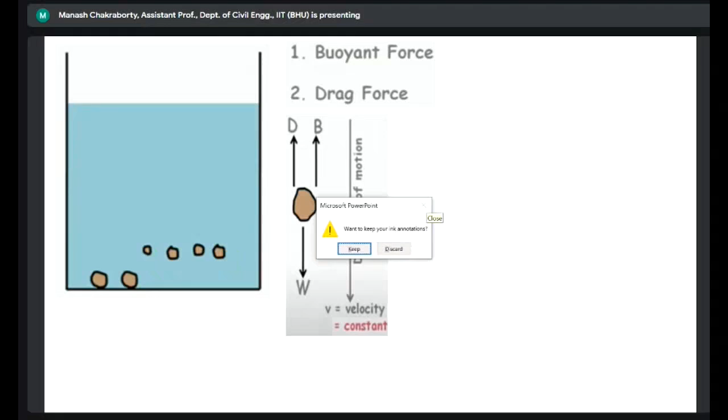Hello? Hello? Hello? Am I audible? Yes, sir. Yes, sir, you are audible. Yeah.

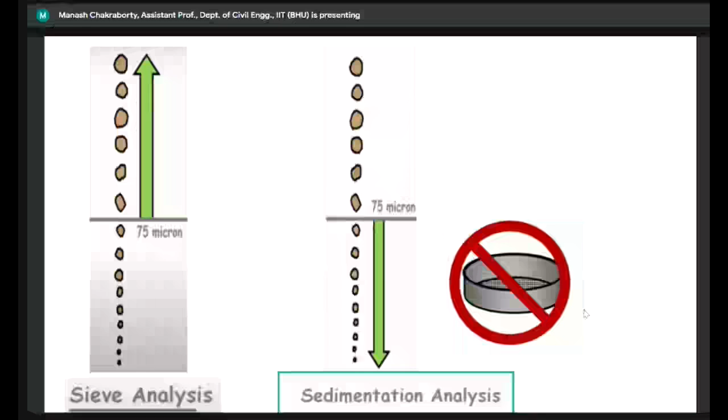Okay, so for these particles which are less than 75 micron, we'll be performing this sedimentation analysis. Now, what is the logic behind this sedimentation analysis? We consider that a particle will start to settle, because we know that any material in nature will try to attain an equilibrium state.

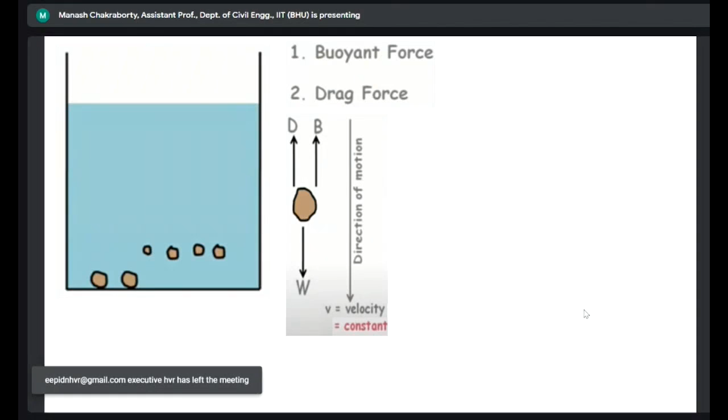So that's the objective of all material, and so for these particles too, the objective is to reach that equilibrium state. What we have studied in our engineering mechanics class is that when a particle flows on another substance, or when a particle is there in any kind of material among other foreign bodies, there are a few forces that act on that particular particle. Obviously weight is one of the forces. Apart from that weight, you have this drag force as well as this buoyant force.

Buoyant force will be because of the Archimedes principle, and this drag force due to Newtonian mechanics. Now the equilibrium state is when your weight force will be equated with this drag and buoyant force. So the summation of the drag force and the buoyant force needs to be equilibrated by the weight force. That is the objective of each particle, so the particle will settle on this medium, and the medium that we'll be considering over here is water.

So what we'll be doing is take a certain amount of soil which passes through this 75 micron sieve, and we'll place it on water. Now the particle will start to settle. How long will the particle be settling? Till the moment it reaches this state, so this particular equation is being attained.

And if we just use this drag force, buoyant force, and weight force, and write the expressions of these forces, then eventually we'll be getting an equation where we can see this last equation where V is denoted as velocity, which is a function of a constant number and the diameter of the particle, where capital D refers to the diameter of the particle. So don't get confused with this D and that D -- although I should have mentioned different things. So this is the drag force and this D is the diameter part.

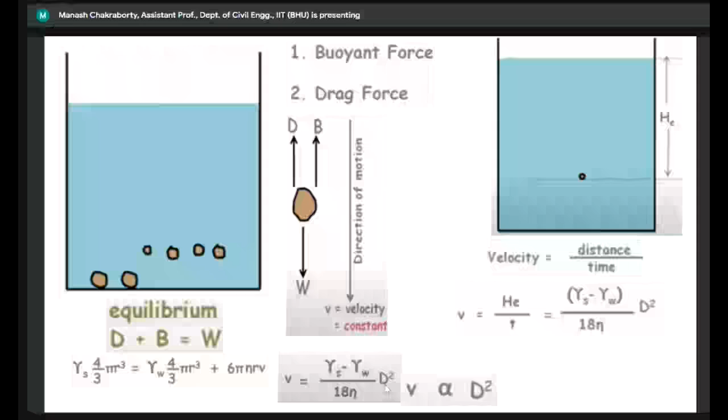So what we'll be doing is, we need to have this velocity. If I just take one individual particle, at a particular depth, you have this HE, which is known as the effective depth. This is something which is measurable. How will you be measuring it?

You can measure it by using two different approaches. One is known as the pipette method, the other is the hydrometer method. The hydrometer method will actually provide us this HE, and how this HE is going to vary with time.

If I know HE, and I can get this HE for a particular or specific time, and this is a constant number, I can get this D value. So that is the way we use this hydrometer method. So the objective is very clear.

In this, we are taking the help of sedimentation analysis, and especially the Stokes law, wherein we are determining this effective depth, which is HE. HE will be obtained through the hydrometer, if we perform hydrometer analysis. If we perform the pipette method, which is normally not performed in many laboratories, therein also we'll be getting this HE part.

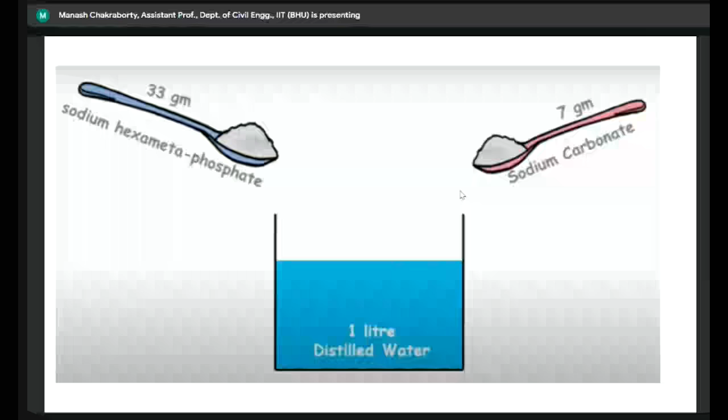This is a jar which contains the deflocculating chemicals along with 1 liter distilled water and the sample as such. That needs to be poured into another jar, where the measuring units are provided, because this is where we will actually perform the hydrometer analysis.

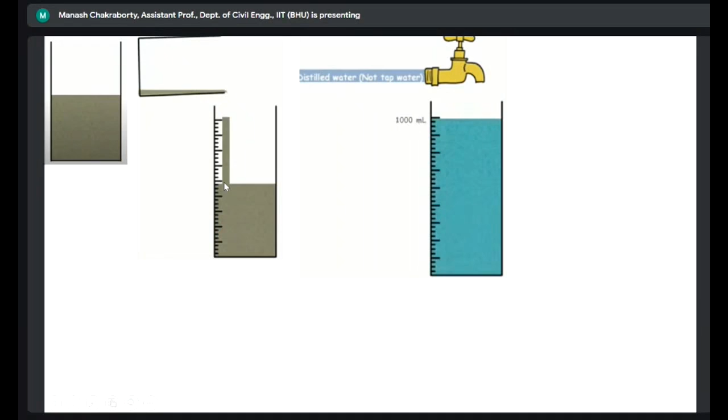It is suggested that the entire amount of this substance should be up to 1000 milliliters. So after pouring this sample into the measuring tube, if it is not 1000 ml, if it is like 700 ml or 800 ml, we need to pour distilled water. Upon pouring this distilled water, it will reach 1000 ml, and then we need to shake it vigorously to make the sample homogeneous.

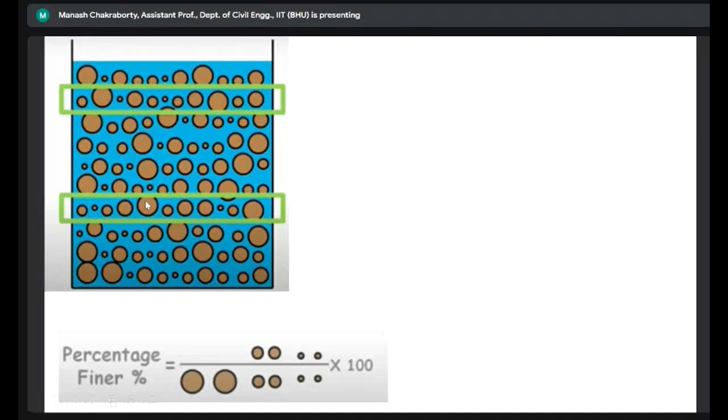Once the sample is homogeneous, it suggests that everywhere the number of particles or their arrangement is the same. Let's say if I look at two layers: if there are two big particles in one layer, this particular layer will also show two big particles. If there are middle-sized particles, say 6 in this layer, this middle-sized particle count will also be 6 over here.

After this, when you give time for this material to settle, what we've seen is that higher the diameter, higher will be the speed of settlement. So the terminal velocity of the particle will be quite higher, and this big particle will be settling faster than the small particles. So for the same layer, after half an hour, for this layer there are only two particles remaining, and over here you have 6 particles.

So what we need to see is the percentage finer. That is our job. How will we get this percentage finer? By seeing this, let's say if you have to get the percentage finer of this region...

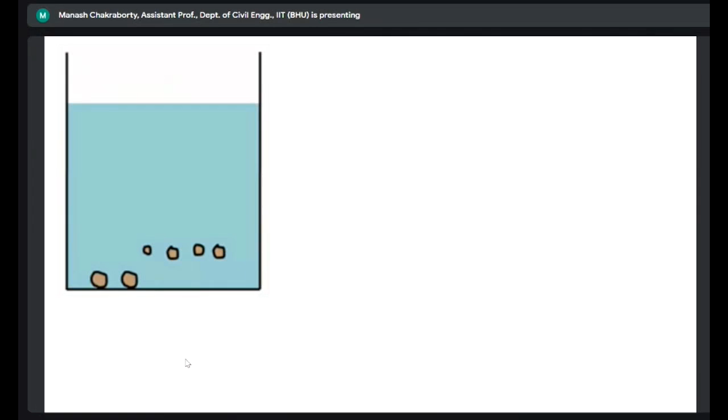Again, how will we be doing it in the laboratory? We'll be doing it through the hydrometer. In that hydrometer part, eventually we'll get one particular number known as the hydrometer reading. That reading will be used for determining two values: one is the diameter of the particle. How will we get this diameter? From this equation, we have to get this He from that hydrometer reading.

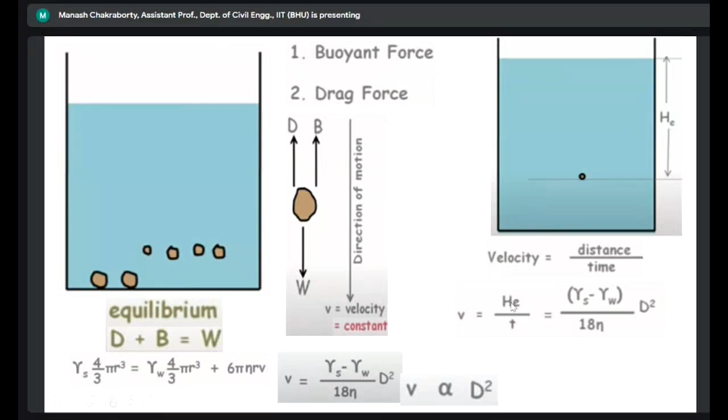Now there is a kind of relation, and I am not covering that particular part right now, of how the hydrometer reading and this effective depth are related. That is available in the code through something known as the calibrating chart. So for each hydrometer reading, this He is fixed, and you can get it from that hydrometer reading.

Next, what you need to do is get the percentage finer. How will you get it? Again, you have the hydrometer reading data, and that needs to be incorporated into one particular equation. That particular equation will give you the percentage finer.

These slides are meant to show you the glimpse of the importance of this hydrometer reading. The hydrometer reading will be used to get this He, and He eventually will give you two values: one is the diameter, and the other is the percentage finer. We'll get the diameter by this kind of inverse approach, and we'll get the percentage finer by the direct approach. Once these two values are obtained, then we need to get the grain size distribution curve.

Now, obviously, is this method completely justified? No, obviously not, because we have a lot of assumptions. Remember, this thing in soil mechanics is full of assumptions. It's completely empiricism, and lots of assumptions are involved. But as an engineer, we need to be aware of those assumptions.

Because this is the method that is being suggested to us. But once the data is being given, we need to adjust something so that these limitations, or these assumptions, are being gotten rid of in some way, right?

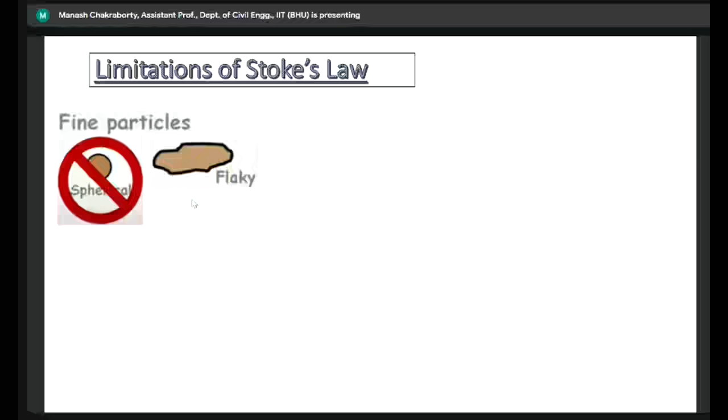One thing I told you is that Stokes' law is based on the assumption of particle diameter, and how we define particle diameter, we assume the particles to be spherical. But in case of fine grained particles, less than 75 micron, none of the particles will ever remain spherical. The particle will be flaky in nature, plate shaped. So can you assume this flaky particle to be spherical? Obviously not. So that is one of the major limitations of this approach, which we normally do in this hydrometer test.

Next, what we assume is that the specific gravity of each particle is the same. We don't say the specific gravity of the bigger particle and the smaller particle are different. When we compute percentage finer, we use one particular specific gravity, which is a kind of average specific gravity, and will not give importance to the independence of specific gravity related to each particle. So that is again a major limitation of Stokes' law.

Then in Stokes' law, we allow the particle to settle down, but Stokes' law is valid only if there is no restriction imparted on the particle, or in other words, the extent is infinite. So when particles settle in this measuring tube, they will have different kinds of motion, getting diverted because of the boundary. That is something which should not be there in Stokes' law. So this equation, the percentage finer equation I was referring to, is valid only if the particles have a free flowing environment.

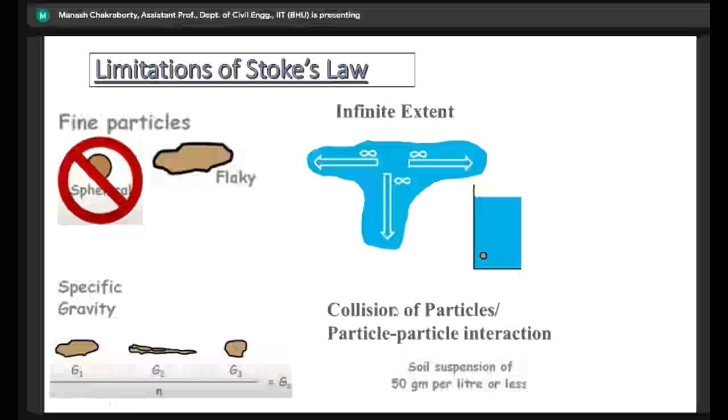While performing this test, keep in mind that although I said below 75 micron we will be performing this hydrometer test or pipette test, we have to be careful that if the particle is below 0.2 micron, we can't do this test, because there will be Brownian motion. And even if the particle is greater than 0.2 millimeter, again we can't perform this test because there will be turbulence. I told you about terminal velocity earlier.

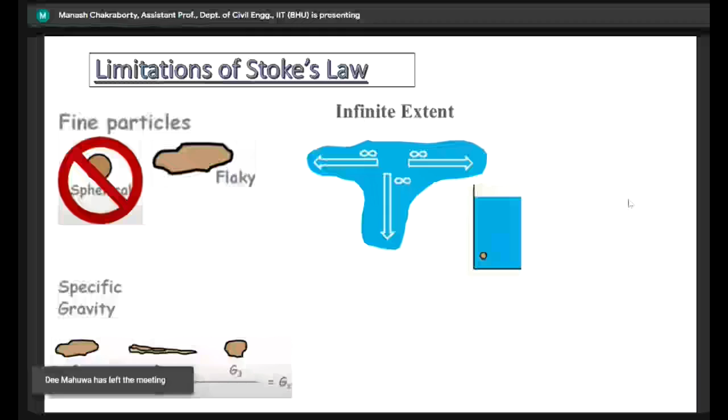While referring to this velocity, I used the term terminal velocity. And when talking about terminal velocity, I used the technical word laminar. That velocity will be attained when the flow is, in a sense, laminar. It may not be completely theoretical free flow, but the turbulence should not be there. So these are some restrictions and limitations associated with this law, and we have to be careful.

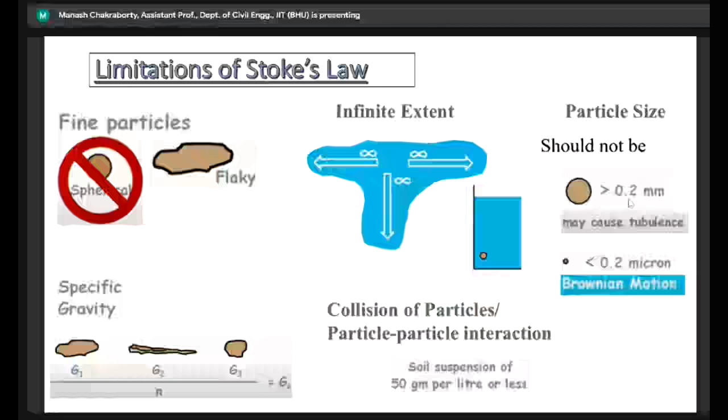That's what we mean. So now, eventually, from this grain size distribution, we have performed the sieve analysis, we have performed hydrometer analysis, and eventually we'll be getting a grain size distribution curve.

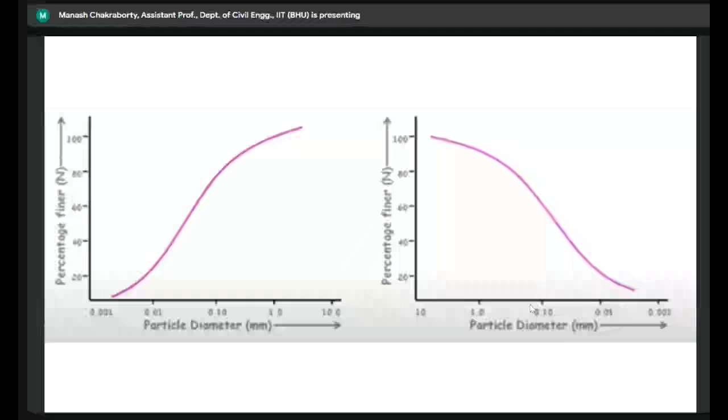That's the advantage of using this logarithmic scale for the x-axis. But for the y-axis, the value is from 0 to 100, and it can be plotted in arithmetic scale. So here you have the arithmetic scale, and here you have the logarithmic scale. This is a semi-logarithmic graph used for plotting this grain size distribution curve. My discussion will be based on the first way of plotting, where the bigger number is plotted on the left side.

In the IS code, it is suggested what the size of the particles is, or the name of each particle according to their size. Gravel, as I've already mentioned, refers to particles higher than 4.75 mm. And sand is from 4.75 mm down to 75 micron. There are obviously far more classifications for each of these sizes.

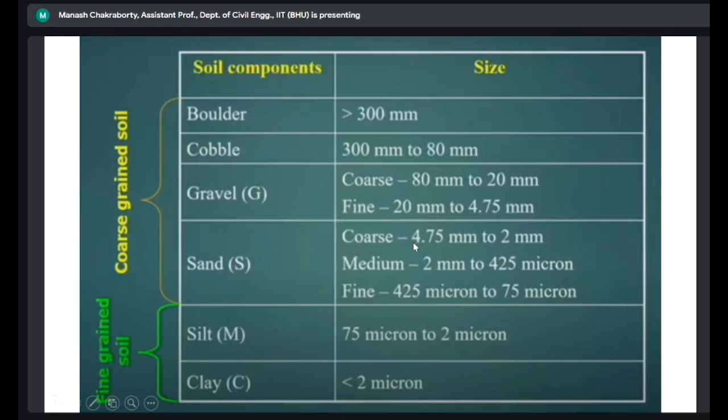Now look at this particular curve - what does it suggest to us? This particular curve suggests that the soil for which this graph was obtained consists of all particle types: gravel, sand, silt, and clay are all present. When we look into a grain size distribution curve, I'll talk about what things we need to actually look into. First we need to see whether all the particles are there or not. Then we need to see which particles are more dominating.

Let's say for this case, what we can see for silt kind of material - how much percentage is there? How much percentage finer is there? It can be read as going from maybe 65% to around 10%. So a huge amount of silt seems to be present here. First of all, all the particles are there - that itself is an observation that makes sense. Next, we need to understand which type of particles are predominating. I will show you some more curves.

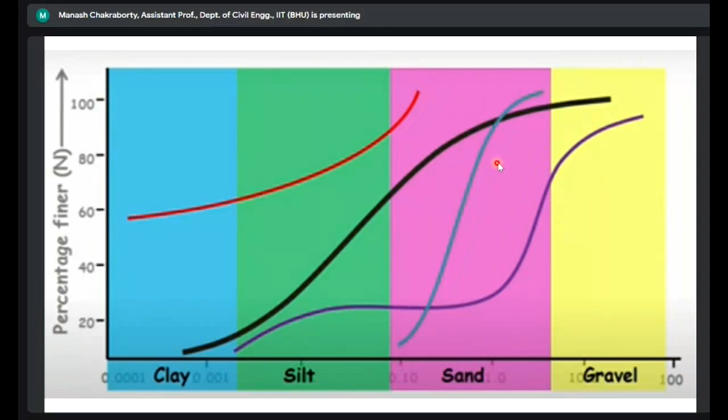Now let's talk about this blue curve. It doesn't have any gravel, silt, or clay, nothing is there for this blue curve. So the soil for which this blue curve is obtained, that particular soil actually consists of only sand particles.

Now you have one more curve over here. This particular curve is somewhat different. Although we can see some presence of gravel, sand, silt, and to some extent a bit of clay, one thing we can see is this horizontal part. What does that mean? This horizontal part means there is missing of some particles, so here there's actually no particles as such.

Now let's say I project this point on the x-axis and this point on the x-axis. What eventually I'll be saying is that the diameter here may be, let's say 0.009 or something like that. So for 0.009, if you have like 25%, for the other point you'll almost be having 25% too. So there is a missing of particles, or having particles of uniform shape. Both things can be treated as not having a good linkage with the engineering properties.

Now you can see one more curve over here. What does this curve actually replicate? The black one is a typical grain size distribution curve. How does this black line look? It looks like an S-shape. This S-shaped curve is more attractive, giving an implication that that particular soil is good in engineering behavior. But when you have this kind of curve, which is concave upward, it tells a huge amount of different story.

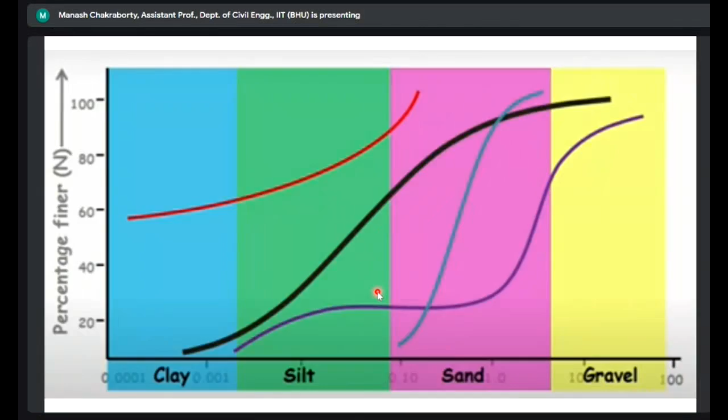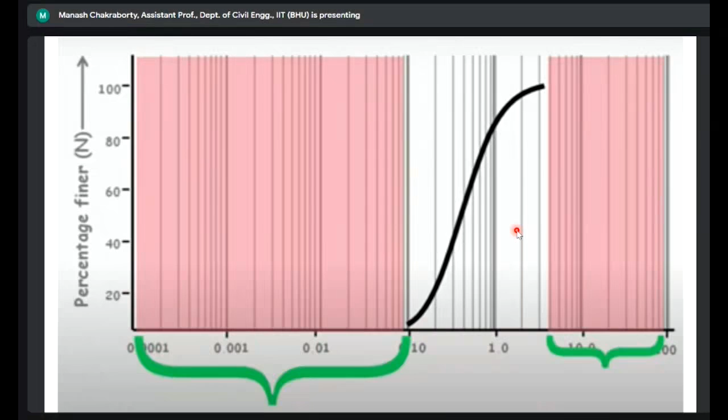So when I talk about this black line, what we can see is that these particles are kind of missing for this black curve too. So in a sense, although it looked like an S-shaped curve, it is in a sense S-shaped, but whether it's recommended, to some extent yes, if you don't have representation of all other particles. But this is also a curve that talks about uniformity - all the particles will be uniform in nature. So you may have this uniform kind of curve, where all particles are uniform, or you can have this kind of curve where there are some missing particles.

So you have this horizontal line, and the horizontal line represents that missing stuff. Or you will have this red kind of curve, which is highly not recommendable - we will talk about that collapse behavior. So all these lines actually represent poorly graded soil. So none of these, in a sense, is recommendable. That is something we need to be concerned about - how the property of the soil needs to be improved.

Eventually we have a curve which will look S-shaped, and at the same time there will be representation of all the gravel, sand, silt and clay. All representation should be there in that particular curve. So as I was mentioning, a well-graded curve represents that all these particle sizes are present, from small to bigger, all these sizes are present.

When I say this horizontal line, this represents the gap graded part. Gap graded means there's something which is missing, so these particular size particles are missing.

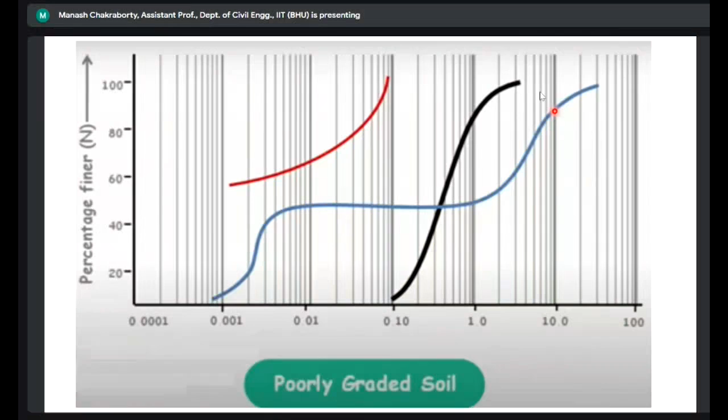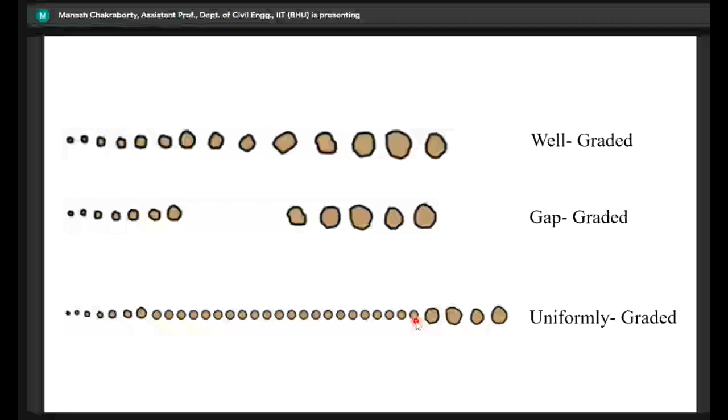And when I say uniformly graded, like this particular black line, wherein we can see the dominance of one particular size particle. Like here, this particular sized particle is dominating, present in quite a huge proportion. So that is termed as uniformly graded.

So how to understand from this grain size distribution curve whether we have achieved our objective or not? We have to get two parameters: one is the coefficient of uniformity and the other is the coefficient of curvature.

Coefficient of uniformity bears this particular relation. We have to get the D60 value and D10 value. D60 means that 60% of the particles are finer than this particular diameter. This D represents the diameter at 60% finer.

Let me repeat this statement again. D60 means that 60% of the soil are finer. You can see these particles are bigger, which is 40%, and these particles are smaller in size in comparison. So D60 is a particular diameter - below this size, you have 60% of particles. This 60% consists of this type of particle, and the remaining 40% particles make up this amount of soil.

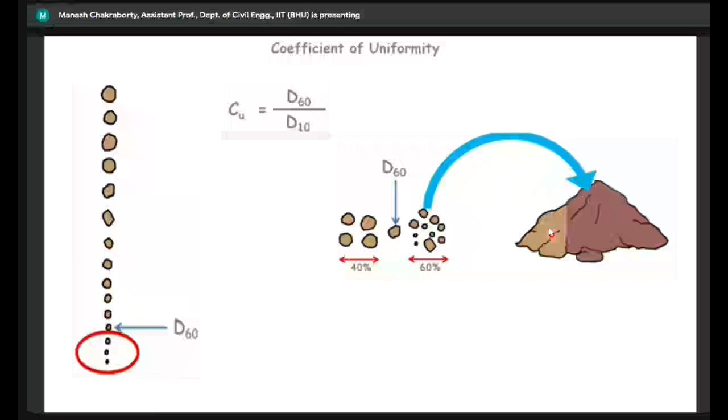So such will be the definition of D10 again. The same thing, that 10% of the soil - obviously the lesser amount of soil, 10% of the soil are less than this particular diameter. That is the meaning of D10.

So from this grain size distribution curve, we have to get the value of D60 and D10, and plug it in to get the value of Cu. Now just think about it, if I say D60 by D10 is equal to 1, what does that mean?

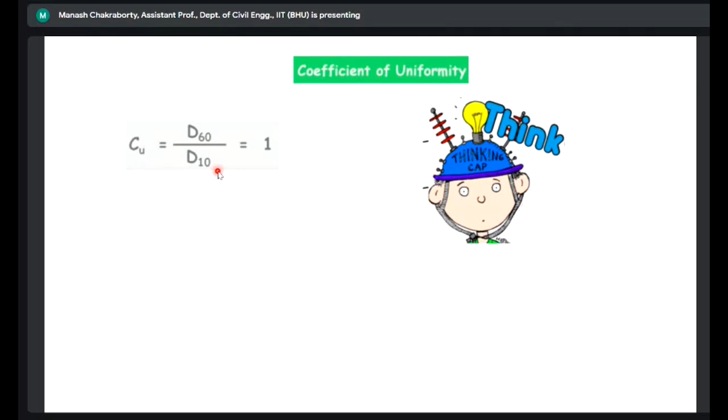As this definition suggests, D60 means 60% are finer than this particular diameter, and D10 means 10% of the soil particles are finer than this particular diameter. So if D60 by D10 equals 1, what I'm eventually saying is that all the particles are actually below this D10. So obviously this shows that if I will be drawing like this...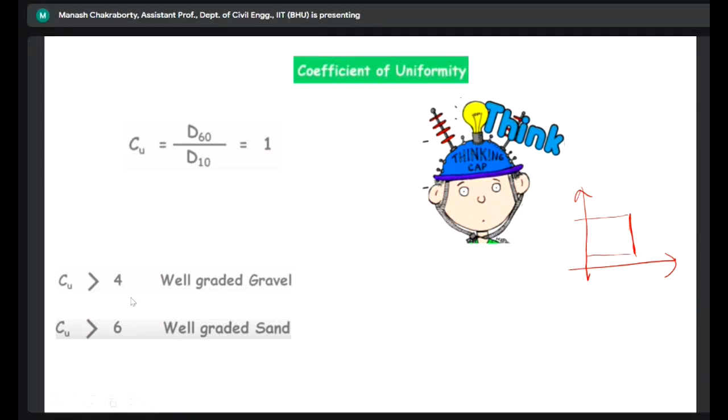So obviously you can understand why the Cu value should be higher, and there is some recommendation given in the code: for gravel, your Cu should be greater than 4 to term that gravel as well graded, and for sand, Cu should be greater than 6 to term it well graded.

What is the value now? Greater than 6, right? So the question is, according to this definition, the Cu is greater than 6. So according to this definition, it seems to be well graded, right? Does it seem well graded? Obviously not, because 2 slides back I mentioned that this kind of curve represents

poorly graded soil, right? But so can I use only this definition? The code suggests that no, this definition alone can't solve the purpose. You need to have one more definition, and that is this coefficient of curvature, right? So you have to take both definitions into account. If you use only this definition, you can have a misnomer, a misrepresentation, right?

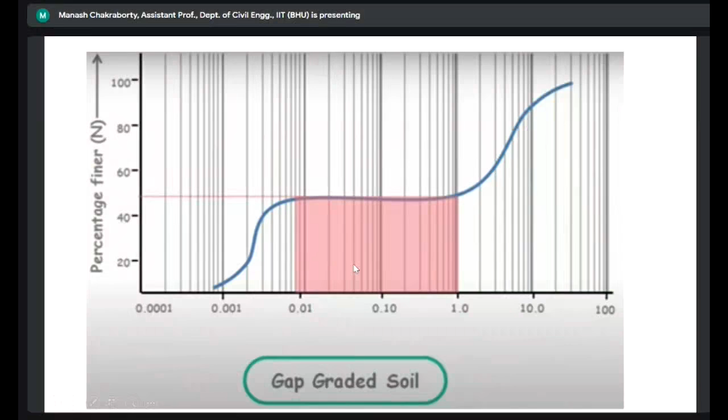So Cu seems to be higher than 6. So according to this definition, it seems that the soil is well graded, right? But here you can see that most of the representation is for sand, right? And for sand it is being said that it has to be greater than 6. So what is the way out?

We have to get this Cc value, which is known as coefficient of curvature. And for getting this coefficient of curvature, we need one more diameter, and that is D30, right? We have already got D10 and D60, and on top of it, we have to get one more diameter to get this value of Cc.

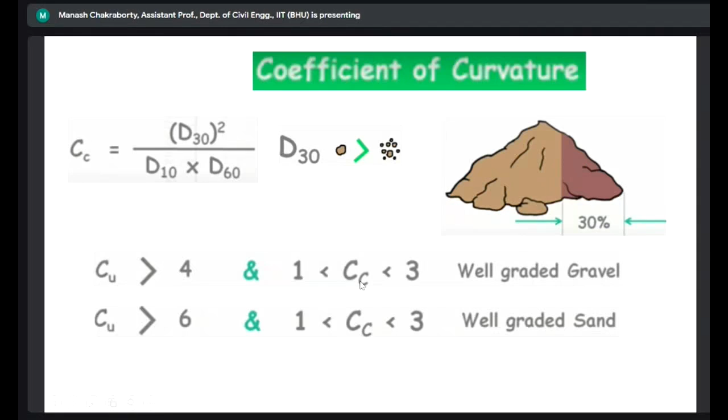And finally, the code suggests that to say gravel is well graded, we have to have this particular expression as well as this expression, right? So coefficient of uniformity and coefficient of curvature both need to be computed from this particular curve, right? Then we can say whether a soil is well graded or not, right?

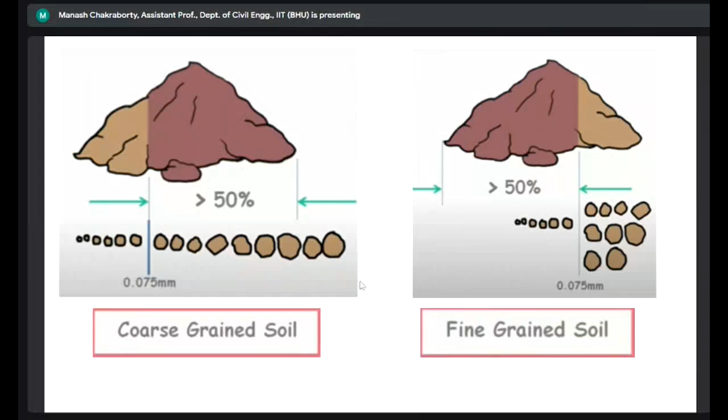So when we classify the soil, if more than 50% of coarse grain is present in a particular soil, that will be termed coarse grained, and if it is less than 50%, it will be termed fine grained, right?

So yeah, this is your now 50%. How will we get understanding of it? Just by seeing the grain size distribution curve. So you have this grain size distribution curve. What we need to see is 50%. You will be drawing this line, right? And you will see whether it is above 0.075, above this 75 micron, or it is less than 75 micron. For this particular curve, it is above 75 micron, right?

So this is kind of coarse grained soil. Now, if I say fine grained soil, I'll again be plotting this curve, and I'll see whether it is below or above this 75 micron. It is below 75 micron, right? So this is fine grained soil, right?

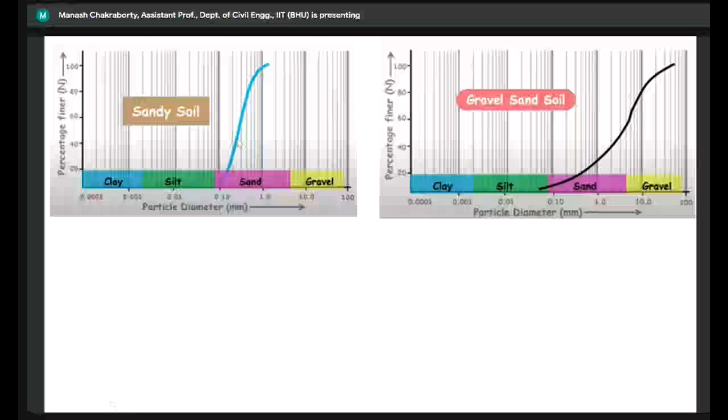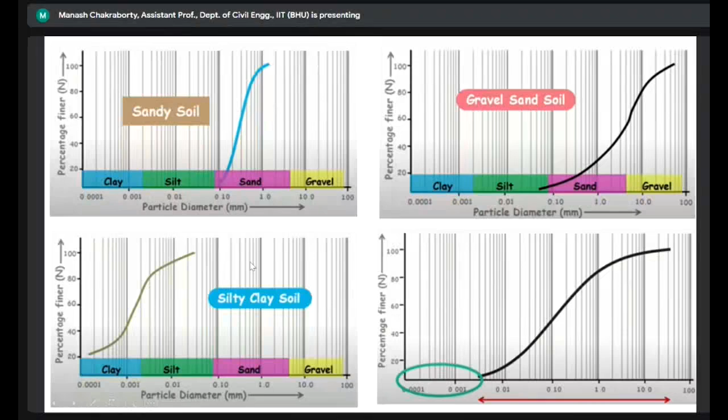So sandy soil, where all the representation is from sand, these are the nomenclatures being suggested, right? And here you can see there are some kind of missing particles, right? So obviously for this silty clay soil, you don't have sand and gravel in this particular soil, right? Okay, so this is all about this grain size distribution curve, right?

Grain size distribution curve, as I was mentioning, is one of the index properties that gives some reference to the engineering behavior of the soil, right? Now this particular curve is being plotted for the entire soil, right?

But consistency of soil needs to be found out exclusively for fine grained soil, because as I was mentioning, fine grained soil is much more peculiar. The behavior of fine grained soil is much more complicated than coarse grained soil, right? So fine grained soil has more aspects to it, right?

So consistency gives you some kind of representation of the fine grained soil. It talks about the firmness of the soil, right? The soil can be soft, it can be medium soil, it can be hard soil, right? Now consistency limit,

And he was an agricultural engineer, right? And he had given this definition of consistency based only on the variation of water content, right? Now when he was mentioning this consistency, obviously some kind of assumptions are being taken, which I'll be mentioning, right?

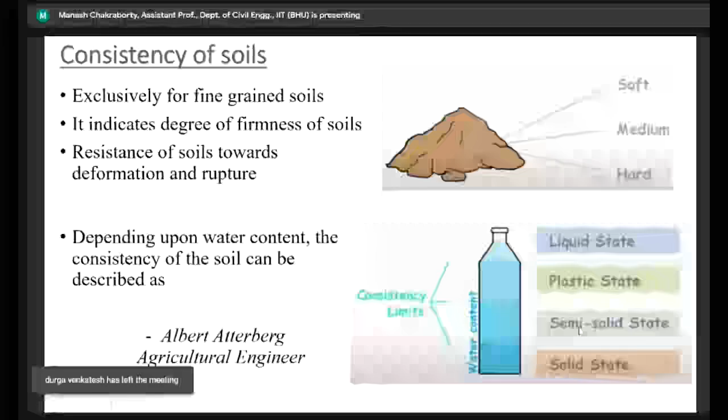Now he told that the soil can be of any of these physical states. It can be in liquid state, plastic state, semi-solid state, or solid state, right? What is the meaning of that?

Liquid state means there is no shearing resistance of the soil, so soil will flow like liquid. Plastic state, soil will have shear resistance. It will not flow like liquid. It can be molded to any shape without rupture. So there is some kind of plasticity attributed in this plastic state.

When the soil attains this semi-solid state, what does that mean? Soil will lose its entire plasticity. It will become brittle. If we mold it, the sample will crack. So there will be generation of crack if the soil is semi-solid.

And solid state means there will not be any volume change when water content is reducing.

So the experiment he performed is, he started from this particular layer. He gave a huge amount of water to the soil, and then he was removing the water. So removing water means water content will be decreasing. He was trying to see that when water content is decreasing, what is the impact on the soil behavior.

So while doing this experiment, he has seen that there is a particular demarcation limit at which the entire behavior of soil changes. And those water content limits are very specific in soil mechanics. One of the limits is this liquid limit, which says that this is the limit at which soil starts to regain its shear strength.

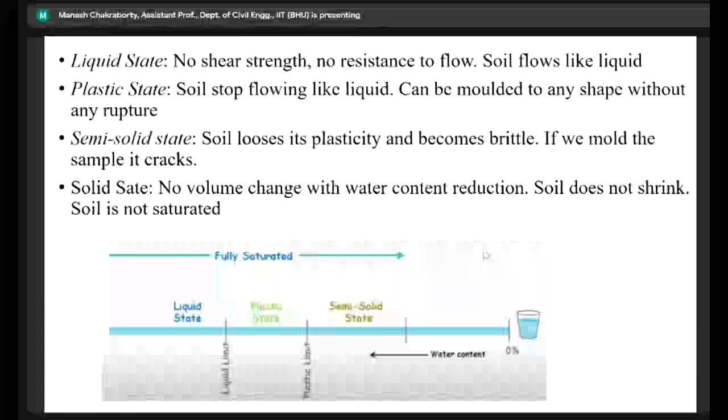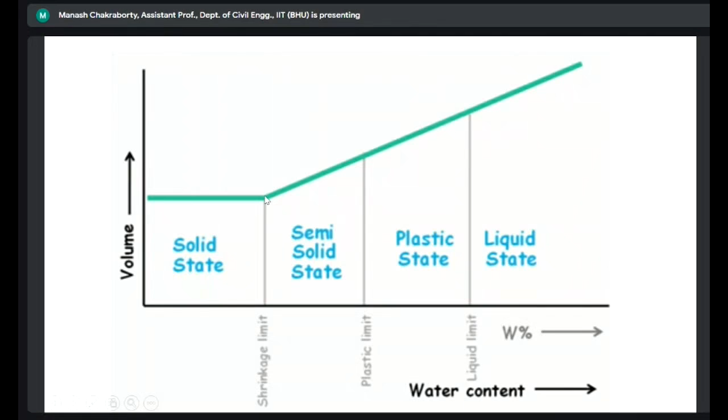I have mentioned that up to this portion, up to this semi-solid state, the soil is completely saturated. Beyond it, the soil is not saturated. So in this curve, this commonality across states is because of that saturation phenomenon. The moment the soil starts to behave in this unsaturated manner, the entire game plan changes, and then we'll have this solid state again.

Now this liquid limit and plastic limit eventually will give us a number, and that number is very important in case of our design, and that is the plasticity index. It talks about the kind of range at which this plastic state is there, and what is the probability of the particle to attract water. Higher the plastic state, higher amount of water will be there in the soil. If the plastic state is lower, the amount of water retained in the soil will also be lower.

So let me give you this: based on the plasticity index, we can say whether a soil is less plastic, medium plastic, or highly plastic. When I say a soil is less plastic, what does that mean? It means the number of clay particles - these brown shaped particles are the clay particles, and these blue particles are the water molecules.

I have mentioned a couple of times that all these clay particles are charged particles. Being a charged particle, it will attract water, so water molecules will get attracted towards it. So less plastic soil means the amount of clay mineral in that soil will be less, so less amount of water will be there. So if you get a plasticity index value like 7 or below, you need to understand that the clay mineral in that soil is less. This is some kind of indication of the plasticity index.

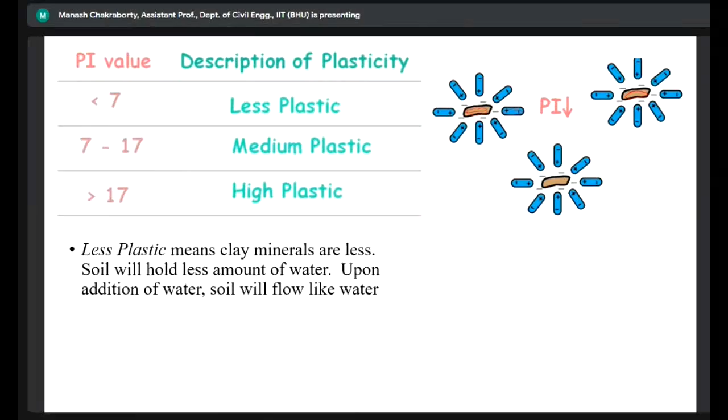If it's a very high plastic clay, that means the number of clay minerals are very, very high. So the ability of attracting water in that soil is also very high. The amount of water that will be attracted in that soil before attaining the liquid state will be quite high for this highly plastic soil.

Let me make you understand from this real field scenario. Let's say you have two soils: one is having a plasticity index of 3, and the other is having a plasticity index of 23. What does that mean? If you are giving water to the first one, less amount of water is required for this material to flow like a liquid.

And for the other soil, you need a huge amount of water, because this range is very, very high. You have a very high range. So that's how you can argue - why are you pushing this limit over here, why not push it somewhere else? Yes, we can do this, but the point is that the amount of water being stored inside the soil will be quite higher.

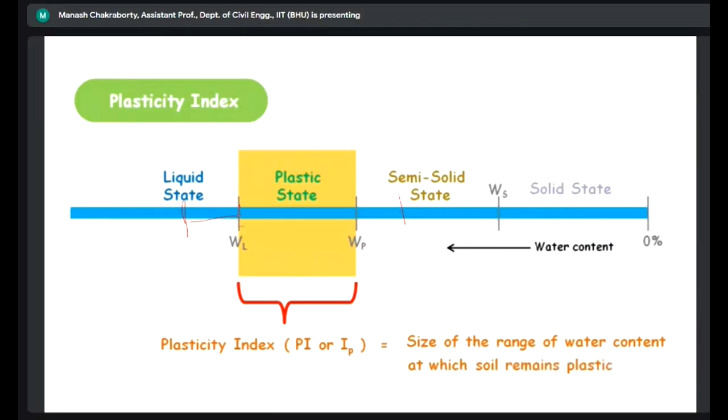Now if liquid limit and plastic limit are very close to each other, almost the same, what does that reflect? It reflects there is no clay mineral in the soil. So just by seeing this number - the liquid limit number and plastic limit number - you can understand how much clay minerals are present.

Now you can ask this question: is it possible that the plastic limit is higher than the liquid limit? I will say that it may be, in some cases it may be, but it's an absurd case. In most real field scenarios, it will not be the case.

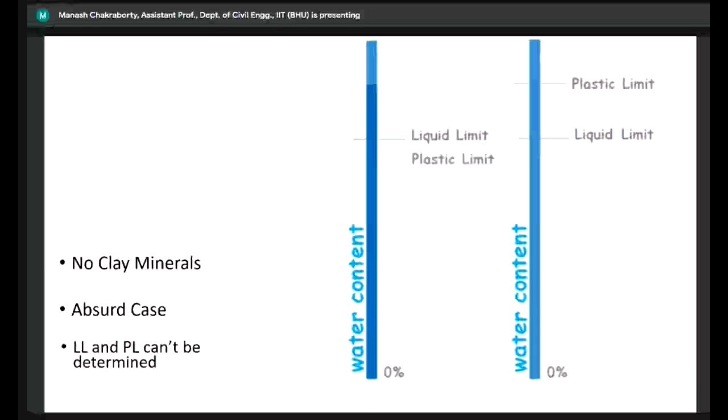Now, it may be a case that you can't determine liquid limit and plastic limit. In those scenarios, you have one more value for this plasticity index. I started this description of plasticity with just three categories: less than 7 and the other two. Now I'm adding one more - that it may even be 0. So for all these three cases...

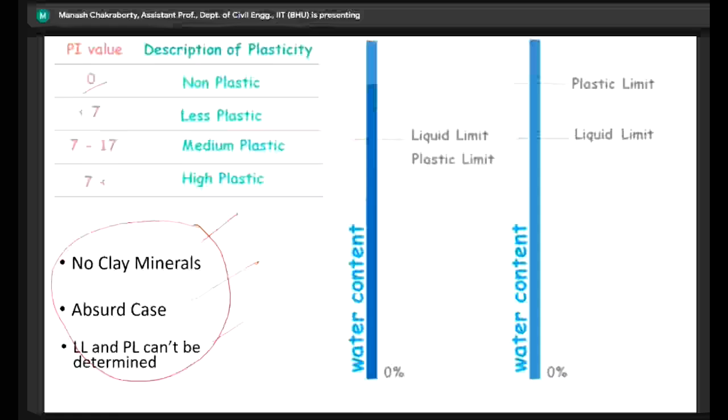If there are no clay minerals, your plasticity index will be 0. If plastic limit is higher than liquid limit, that may be a possibility too, I'm not ruling it out. So it will be a non-plastic soil, and there may be another case where liquid limit and plastic limit are undetermined. Now, how do we get this liquid limit value from the experiment?

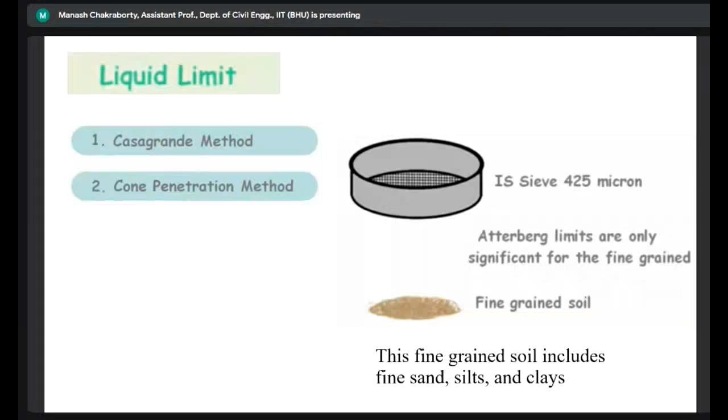We normally use the Casagrande method or the cone penetration method, but in most labs people use the Casagrande method. How it's performed is: you sieve the soil, and whatever passes through a 425 micron sieve is collected and put in the Casagrande apparatus. Before that, you take 120 grams of soil, mix it with distilled water to prepare a uniform paste, then place it on the Casagrande apparatus. There is a ram attached with it, and you need to revolve this ram.

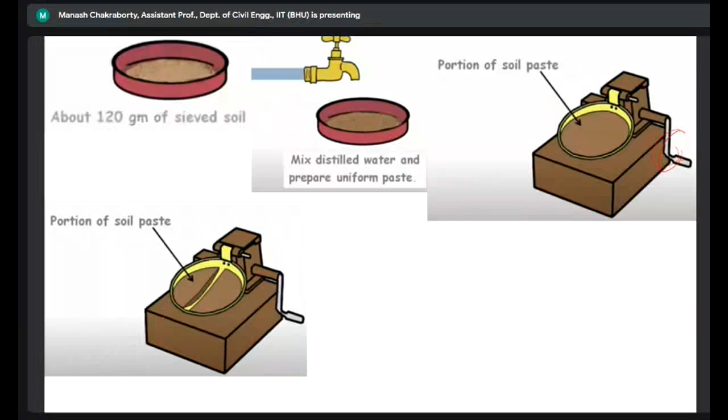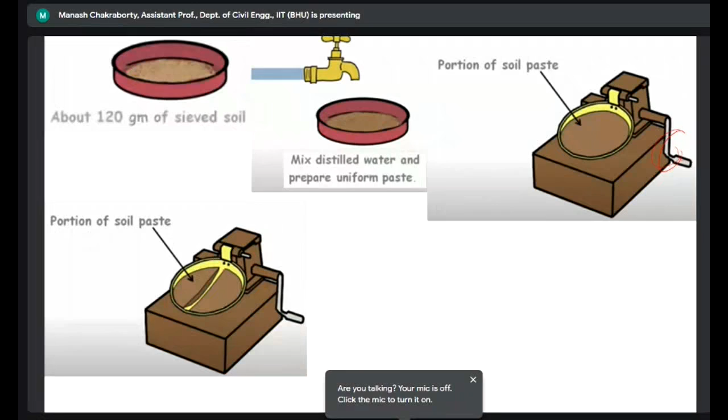So you place this soil paste on the Casagrande apparatus, and then using some grooving tools, a groove needs to be created. There are two kinds of grooving tools: the Casagrande tool or the ASTM tool. Normally people use the Casagrande tool, which creates a groove of one shape, while the ASTM tool creates a different type of groove.

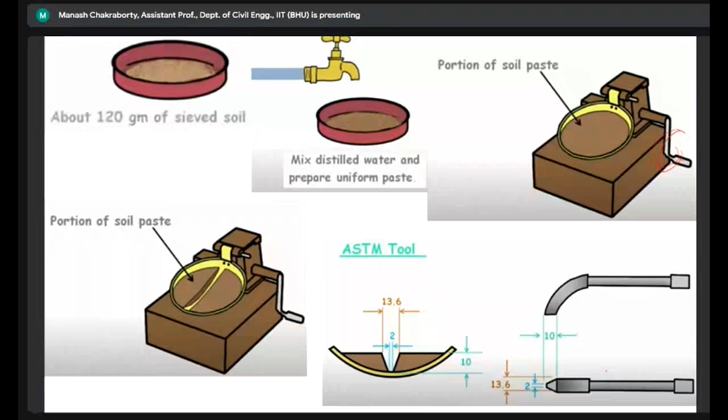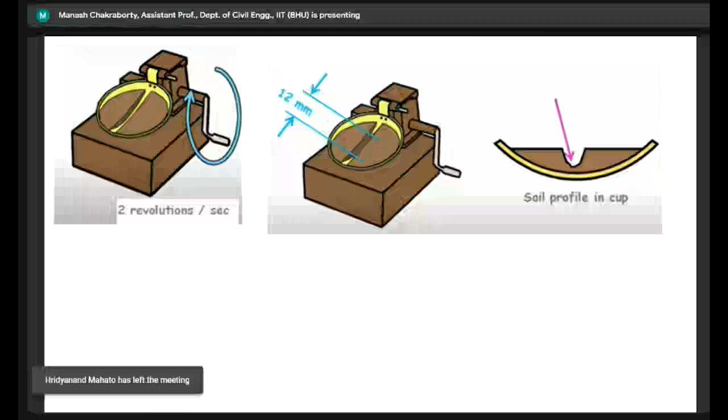Once the groove is created, we need to revolve the arm at a specified revolution speed. We need to see what number of revolutions is required so that there is continuity in the soil at the bottom of the groove, establishing that the disturbance caused by grooving has been removed.

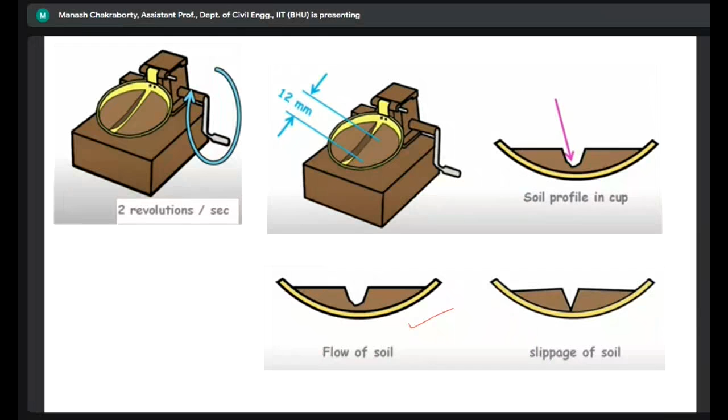While doing this test, you need to focus on two things. The correct flow of soil is acceptable, but any slippage of soil is not. When rotating the device, we must be careful there is no slippage. If there is slippage, the top surface will no longer remain horizontal; there will be some inclination, which is not permissible. There should be proper flow of soil, and that needs to be recorded.

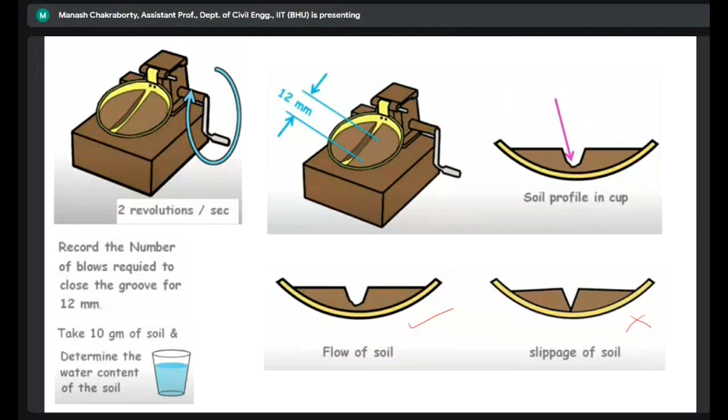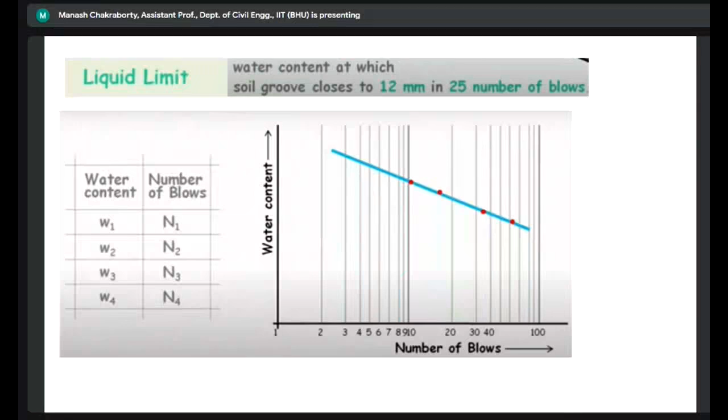Two things need to be recorded: the number of blows required to close the groove, and after the groove closes, we take soil from there, oven dry it, and get the water content. So two values are required: the blow count and the water content. Why? Because according to the code provision, liquid limit is the particular water content at which the soil groove closes in 25 number of blows. So whatever water content corresponds to 25 blows represents the liquid limit of that soil. We do this for 2 or 3 tests.

Eventually we get a linear slope. Now we need to focus on two things: one is the number of blows, which is placed on a logarithmic scale, since we use a semi-logarithmic graph. And to draw a line, only 2 points are required.

Even if we have just 2 points, we could have drawn a line. So you can take one more point just for the sake of confidence, and you can have this line. Once this line is drawn, we have to see what is the value of the liquid limit at 25 number of blows, and that particular value will be regarded as the liquid limit.

Remember, this liquid limit is a whole number. Let's say for this water content you have got like 30.8 or something like that. So you report the nearest whole number, never in any fractional value. Liquid limit has to be reported in whole number, and this is valid for the plastic limit as well.

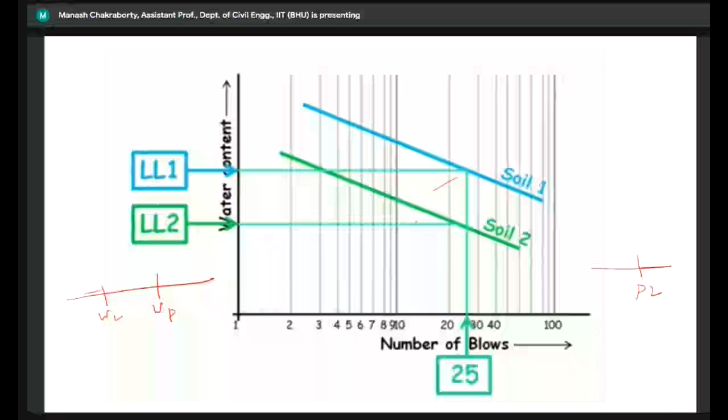We will be rolling the soils into a thread, and there is some kind of diameter being specified, and we'll see that at that particular diameter the crack will start to develop. That is the indicator of the plastic limit. So by this definition, the plastic limit is derived through this experimental process, and no sophisticated equipment is required for this plastic limit determination.

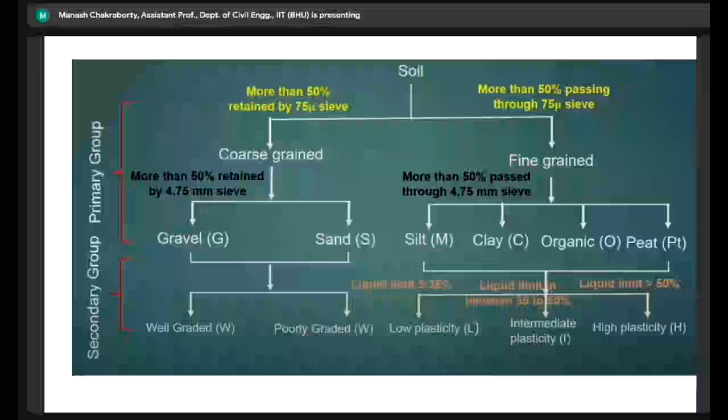And that's how we classify our soil. So soil has coarse-grained soil and fine-grained soil. If 50% is retained by that 75 micron sieve, it is coarse-grained soil, and if 50% passes through that 75 micron sieve, then it is fine-grained soil.

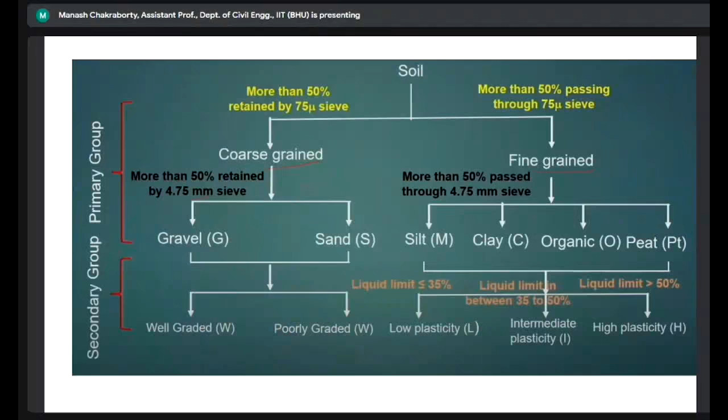So in case of coarse-grained soil, we have gravel and sand, and now gravel and sand are again being classified. I'll show you this classification. We can understand whether a soil is gravel or sand using a demarcator, and that demarcator is 4.75 mm.

If 50% of that particular soil is above 4.75 mm, that means gravel particles are predominating, so that's a gravelly soil. Now in that gravelly soil, we will see what the fine content is. If the fine content is less than 5%, we need not do any consistency test. If the fine content is within 5 and 12%, we need to check a bit in the plasticity part, and if it is above 12%, we need to come to that plasticity chart.

So if it is less than 5%, we need not worry about anything regarding plasticity. We will just look into our grain size distribution curve, get the value of Cu and Cc, and based on these two values, we'll say whether it is well graded or poorly graded.

If the fine content is more than 12%, we are supposed to perform this plasticity analysis, and we need to see whether the soil is below the A-line or above the line, and what is the compressibility of the soil.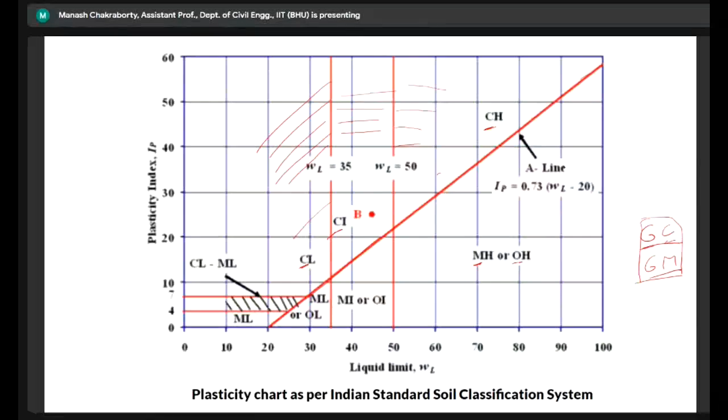Now if the fine content is within 5 to 12%, then we need to attribute a dual symbol like this - well graded soil, and along with well graded, we need to mention whether that gravel contains silt or clay. A similar thing can be associated with the poorly graded case.

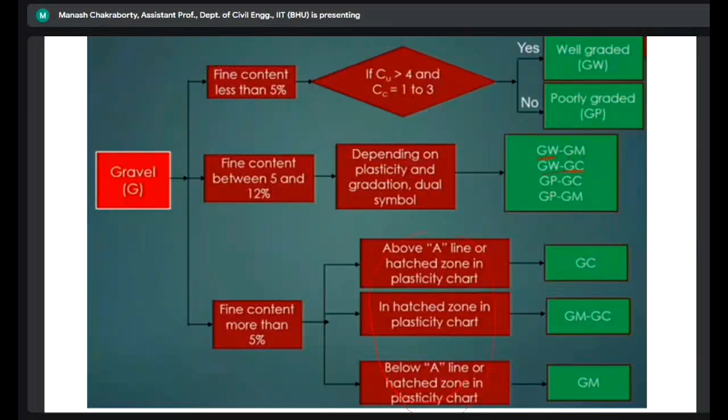So for sand, again the same stuff - we need to see how much fine content is there with the sand. Is it below 5%? Is it within 5 to 12%, or is it above 12%? We use the nomenclature in the same way; the only difference is the first symbol was G, and here the symbol is S.

Now, if it is silt or clay, along with that we have to see the A-line as well as the two vertical lines - the 35% line and the 50% line - to understand whether it is low compressible, intermediate compressible, or high compressible. That's how we perform the grain size distribution curve and consistency limit analysis.

Liquid limit, plastic limit - although I haven't talked about shrinkage limit, because shrinkage limit is not required for this classification. But shrinkage limit is far more important, especially for special kinds of soils.

Now, based on liquid limit, plastic limit, and grain size distribution curve, we have understood how we will identify or name the soil. So we have understood how the soil needs to be named based on these three tests. Okay.

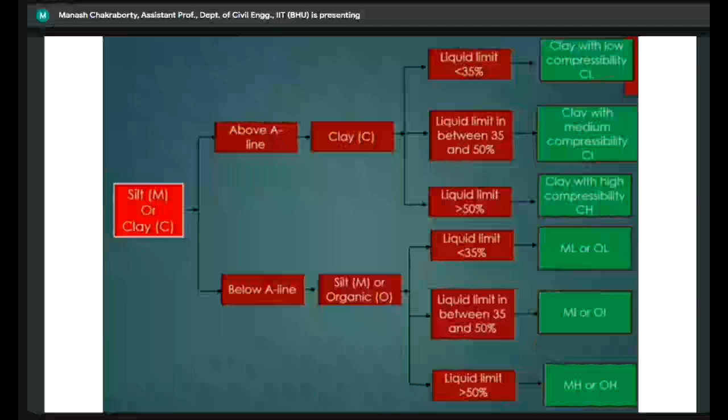So this is the test that we have performed, just to talk about it. For the tests we have performed, they actually talk about the qualitative behavior of soil. Be it this grain size distribution test or this consistency test, they talk about, in a sense, qualitatively how the soil will behave.

Now we'll be seeing two tests for understanding the engineering behavior of soil: one is the compaction test and the other is the shear test. I'll go into it quickly since I've spent much time on the qualitative part. The compaction test talks about the engineering behavior of soil directly. It gives you some indication of the shear strength of the soil if you can understand the compactive behavior of soil.

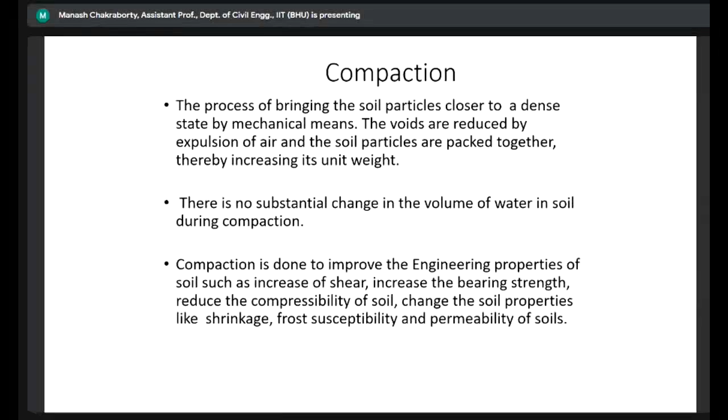Let me make you understand from this diagram. We've probably all seen this basic soil phase diagram - we have the solid, water, and air phases. In case of compaction, we apply some amount of energy from external sources. When we apply that energy, this air portion will be reducing in size, so there will be a case where there will not be any air present in the soil.

So what actually happens? Soil particles are coming closer to each other. When the soil particles come closer to each other, obviously there will be densification. That is actually our objective - how to improve the densification of soil, because we can understand very clearly that higher the densification, higher will be the shearing strength, higher will be the stiffness. So densification is a kind of indicator of the engineering behavior.

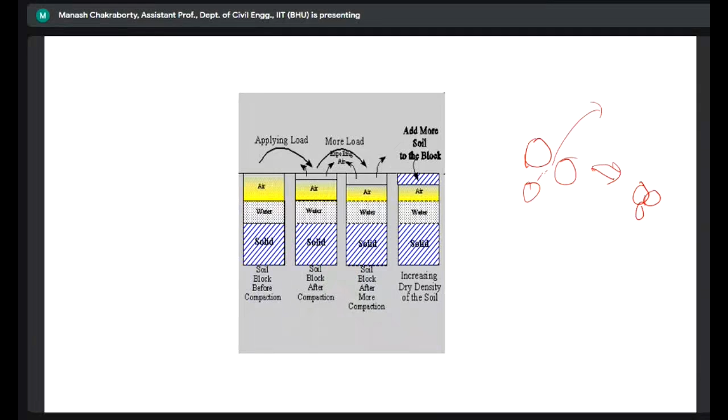So to densify the soil, one approach is obviously compacting the soil. Through this compaction, we are removing this air portion, and the soil particles are coming closer to each other. So let's say these are the soil particles where air is being trapped, so air is kind of removed from the portion, and eventually soil particles come closer to each other. This is a kind of indicator of densification and higher amount of shearing strength.

Now what we do in soil mechanics lab, to understand how the soil will behave in the field due to this external agency, we perform something called the Proctor test. There are two tests: standard Proctor test and modified Proctor test. Both tests are eventually the same thing. The only difference is that in the modified Proctor test, we apply a higher amount of energy compared to the standard Proctor test.

So let's say in the standard Proctor test, if you have 3 number of layers, here we compact the soil in 5 number of layers. In the standard Proctor test, the height of fall, as written in FPS units, is 12 inch. In the modified Proctor test, it is 18 inch. If the height of fall is higher, obviously the imparted energy will also be higher. And the weight of this rammer is also quite high in the modified Proctor test.

So in the next slide I will mention about this compaction curve, which is actually the sacrosanct of this compactive behavior. What we can see here is a curve that is obtained from the laboratory, between dry density and moisture content, or the water content. Remember this - this is the dry density part, so every time we have to get the dry density for each water content.

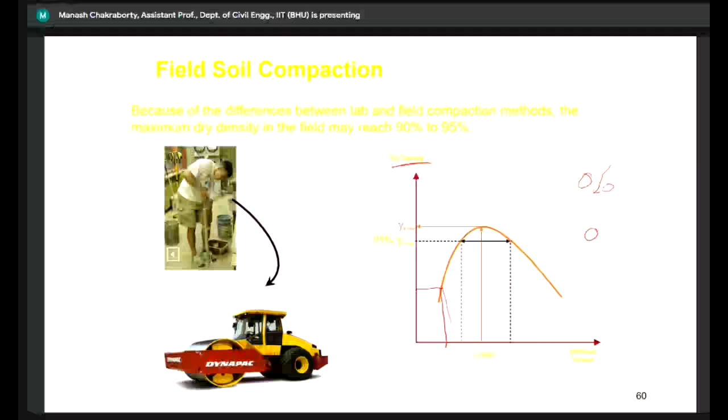Beyond this water content, what happens is that water starts to come within the particle. What I'm trying to say is that some amount of water is being adsorbed at the surface of the particle.

When there is this adsorbed water, we can assume two different kinds of water. One is free flowing water, which is not being adsorbed by any particle—that water can flow freely. That is one kind of water.

The other water is actually attached to the surface of the particles, as I was showing while mentioning the plasticity index. These clay particles look something like this. They are negatively charged, so they will be attracting water.

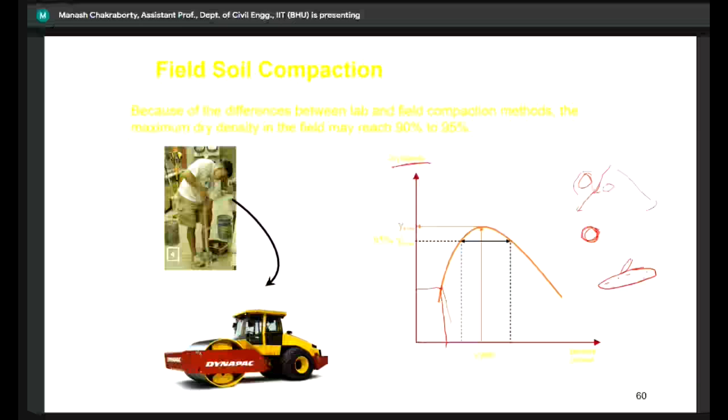So when water is being attracted, these water particles get attached to the particle surface, and this gives the lubricating effect.

When you add more water, more water particles will be added to this surface. If more water particles are added to the surface, the higher the lubricacy will be. And with higher lubricacy, the particles will come closer to each other, and once they start coming closer, the density will be increasing.

But this effect will be there only up to a certain moisture content. Beyond that moisture content, the water particles will not get attracted to the surface anymore—they will behave like free flowing water. Once it starts to flow freely, the particles will be driven away from each other, and your dry density will be reducing.

That is one particular theorem to explain this curve. There is one more theorem based on diffuse double layer, which I'm not going to cover, but I suppose this first theorem is much easier to understand.

Because of that particular phenomenon, you have this inverted V-shaped curve. This is very important, especially in transportation engineering. In transportation engineering, we need to figure out the water content at which we get the maximum dry density. This maximum dry density talks about a lot of stuff—it's a condition which people want to have.

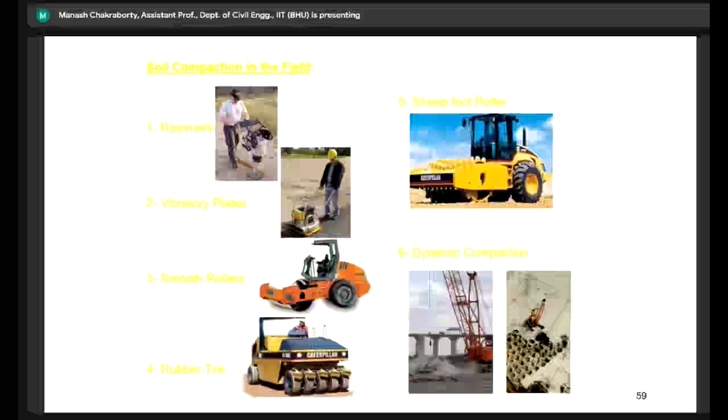So that is one thing we need to understand, how we are compacting the soil. We can compact the soil by different methods, as I have shown over here. This rammer, vibratory plates, smooth rollers, rubber tires, and all this equipment in the field will impart different amounts of energy. We need to understand that higher the amount of energy, this compaction curve will be shifted towards the left hand side.

But apart from the compaction energy, there are many more influencing factors that actually govern the compaction behavior. But compaction energy seems to be one of the major important factors for this compaction curve. What it says is that increasing compaction energy means lower moisture content and higher dry density. That's one of the things that need to be understood.

Now, apart from this particular test, wherein we can understand how the dry density and water content need to be achieved in a particular project, from our laboratory test, there is one more laboratory test that we often perform, and that is the California Bearing Ratio test. Now, what does this bearing ratio test give to us?

It talks about what kind of penetration will be there, or in a sense it talks about the deformational aspect. As I was mentioning, compaction talks about the strength aspect. This California Bearing Ratio talks about the deformational aspect.

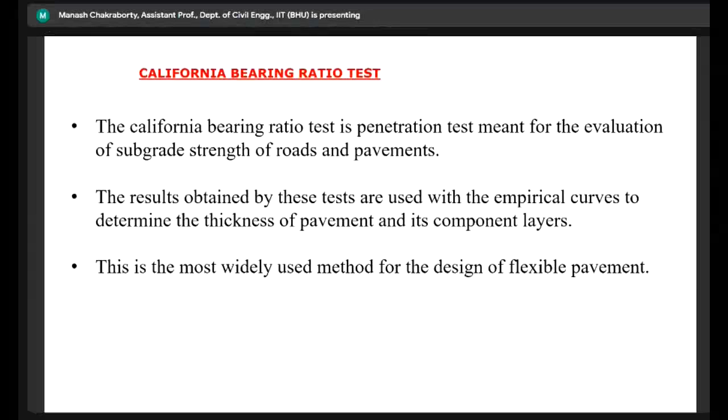So I'll straight away go to this definition. So what does this definition give to us? It is the ratio, expressed in percentage, of force per unit area that is required to penetrate a soil mass with a standard circular plunger of 50 millimeter diameter at the rate of 1.25 millimeter per minute, to that required for corresponding penetration in a standard material.

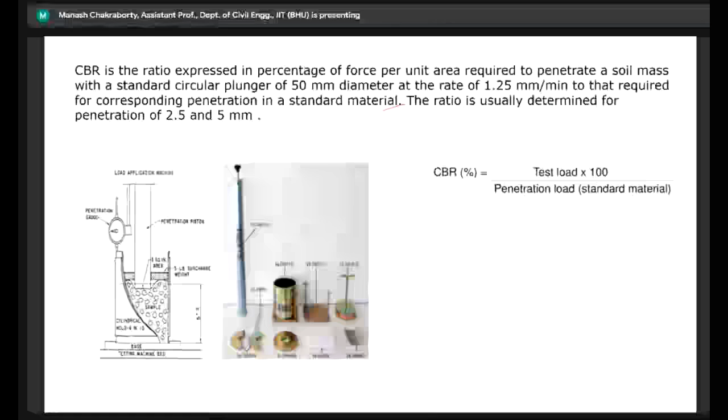So let me just make you understand this statement. So CBR, how will we be getting the CBR value? We have a plunger, we have the standard stuff. What we need to see is how much load is required. So end of the day, our objective is to see how much load is required for that plunger to have a certain amount of penetration.

And that certain amount of penetration is specified as either 2.5 mm or 5 mm, again based on different aspects. There is a rate at which you will be applying the energy, and this rate is specified as 1.25 mm per minute. Based on that rate, we'll be plotting something called the load versus settlement curve.

Now there is some kind of codal provision to it, that a CBR of 8 to 9% is recommended. Now that's how you will actually be getting some kind of influence of the deformational aspect of the soil. So that's from my side.

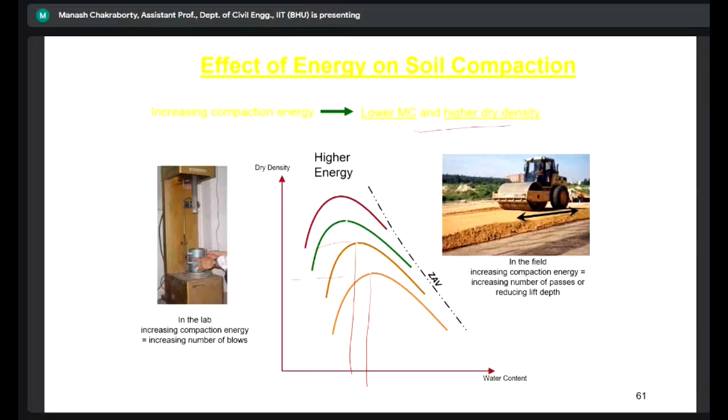So to summarize the entire stuff we have covered, I started with the qualitative response or qualitative behavior, how we kind of tap it in the laboratory, then some kind of quantification - quantification of the mechanical strength and stiffness both in the laboratory, that is required directly to be used in transportation engineering or for the subgrade soil. So these are the four things in a nutshell that we have discussed over here.